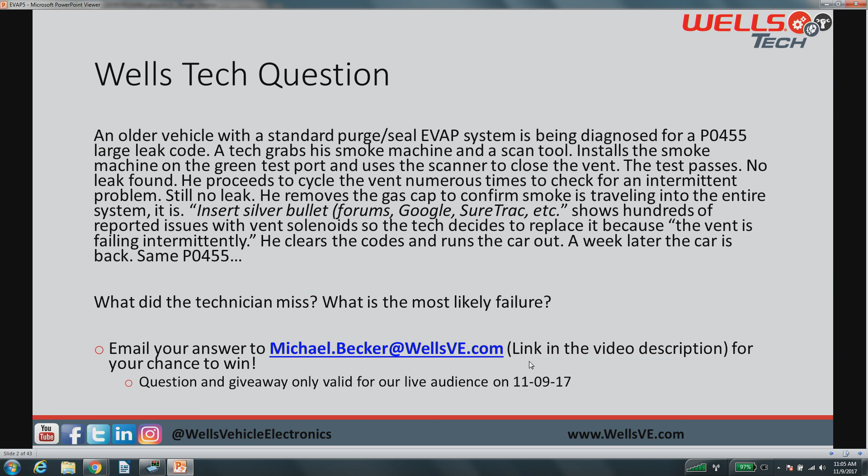What did the technician miss? What is the most likely failure for this problem, okay? Just a hint, guys, it's not going to be an intermittent vent solenoid, and the new vent solenoid that he put on is not failing either, okay? So don't give me that. I want you guys to think and tell me what you think is going to be what he missed in his testing and what the most likely failure is, okay?

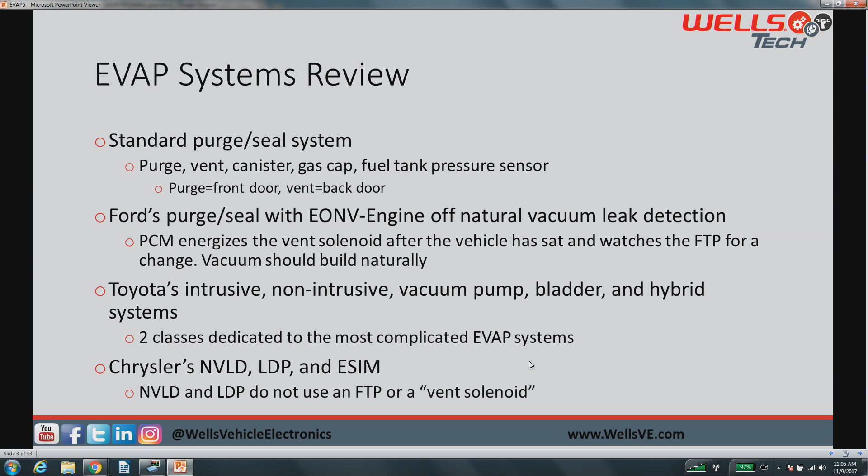All right, let's get right into this, just a little review here. These are the systems that we've talked about before. The first EVAP class, we covered standard purge seal and some Ford EONV. The second two classes we used to cover Toyota and all their complicated systems. And then the last EVAP class we did NVLD, LDP, and ESIM. So if you're not familiar with any of those systems, please be sure to go back and check out those classes where we include that information, because there's going to be some stuff today that is going to build upon those classes, okay?

Again, I'm not going to get into this stuff, these review ones. Make sure to go back and check it out. So what we are going to cover today, we're going to start with the DMTL system, the Diagnostic Module for Tank Leakage System. It's going to be very similar in comparison to the Chrysler leak detection pump system.

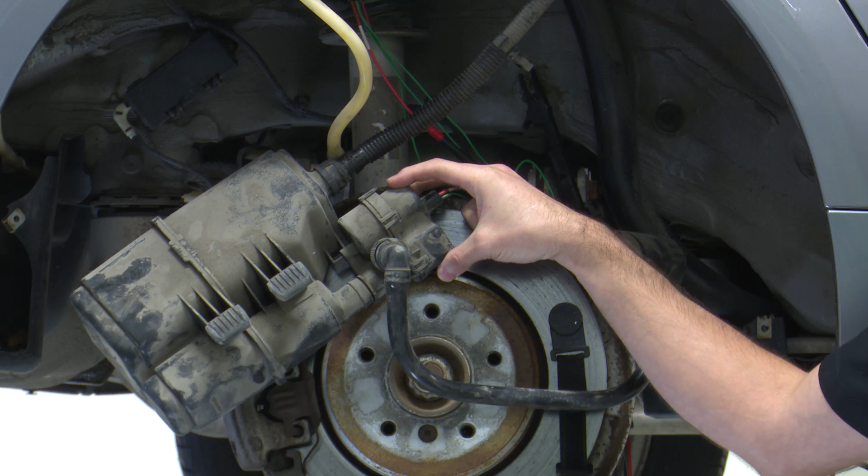It's going to be mounted on the vent side of our EVAP system, and it's usually canister mounted. As you guys can see here behind me on this BMW, if we get a close-up shot of this, you'll see that our valve here, our DMTL pump assembly, is mounted directly to the side of our canister. Now, commonly this part is replaceable separate of the canister, which is kind of nice because these things do fail. Now, this one on this 5 Series Beamer is sitting normally up inside of the wheel well up there. I've dropped it down for testing purposes for us to see it today. But you can see it's all covered in dust.

All right, there's a filter on this system. Right here is an inlet-outlet filter from the canister side. Okay, so keep in mind if you're having restriction problems on these systems, or any system for that matter, check out that filter element and make sure that it's not plugged up. Especially if you have flow issues when you're filling up the tank or something like that, you know, you're putting gas in it and the fuel's spitting back at you. Check out this filter for being plugged up. Your vent path is plugged, it cannot vent the tank out.

Okay? You will typically find these systems on European models. DMTL is going to be common across the board for Beamer, Mini, Land Rover, Volvo, Mazda. Some Hyundai Kias run them. The most common is probably going to be an older Hyundai Accent, is going to be the most common. But you will find these mostly on European models.

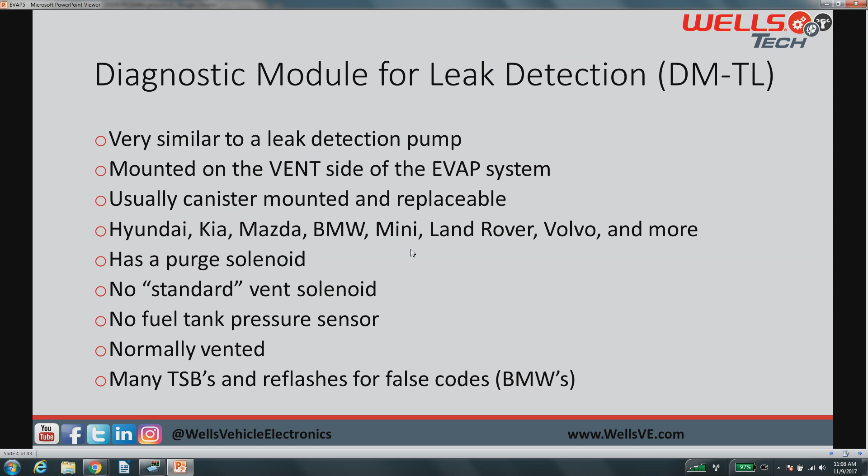This does use a standard purge solenoid under the hood, opens and closes, PCM pulse width controlled for the purge solenoid. There is no standard vent solenoid on here, all right? It is going to be incorporated into our pump assembly. It is not going to have a standalone vent solenoid like you would normally see, okay? There's also no fuel tank pressure sensor. So again, kind of going off of that Chrysler system with no fuel tank pressure sensor, there is no FTP on this vehicle. Don't look for the PID. You're going to waste your time because there's not one.

All right? This system is going to be normally vented, and I just wanted to take a second to call out to look for TSBs and reflashes for these vehicles. BMW especially, common to be setting codes for EVAP problems that aren't actually a problem. The parameters or something got changed in a reflash, and it's setting false codes, okay? So keep that in mind if you're diagnosing EVAP issues on a BMW. Look at your TSBs for any sort of reflashing.

Let's just see what everybody's saying here. Oh, you guys are busy.

Oh, Keith. My eyes aren't spaced that far apart, right? Is it normal looking? You and your theory on Wisconsin people. Oh, man.

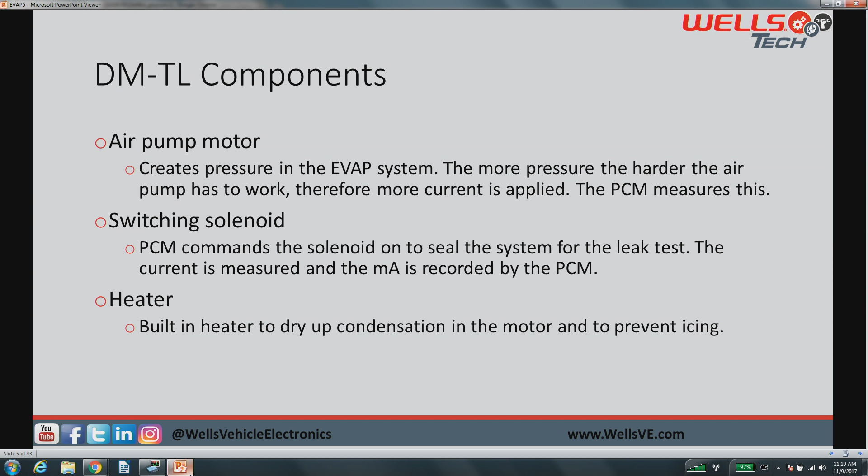So the components in our DMTL system, in that pump assembly, you're going to have an air pump motor in there that's going to create pressure in the EVAP system. The more pressure that's built up in the EVAP system, the harder that this pump is going to have to work. That's the principle of this system.

As we build pressure inside of our fuel tank, inside of our lines, inside of the system in general, the pump is going to have to work harder. The PCM is watching that work, watching how hard the pump has to work. It measures the milliamp draw on this pump, and it's looking for it to increase as this tank is filling up within a set amount of time, right?

Everything on EVAP is going to function over time. So our pump milliamps should start to scale upwards as we build pressure inside of the system, okay? The PCM is measuring this. This is basically our threshold, or let's call it our fuel tank pressure sensor, even though it's not, but this is how the PCM is monitoring the system.

There's a switching solenoid inside of this assembly. The PCM is going to command this to seal the system for the leak test. Again, this is a normally vented system, and the PCM will command this, ground side controlled, to close and test the entire system for leaks.

And then we have a heater that is built into this thing. This pump motor behind me here has a built-in heater, and the goal of this is to reduce any sort of condensation or freezing or icing of this pump motor.

So today we're going to scope everything and show you guys how it all works. We may not see the heater operate because it's about 70 degrees here in the shop. But if it were cold out, chances are you will see this heater operate, as the goal is to keep this pump from freezing up, okay?

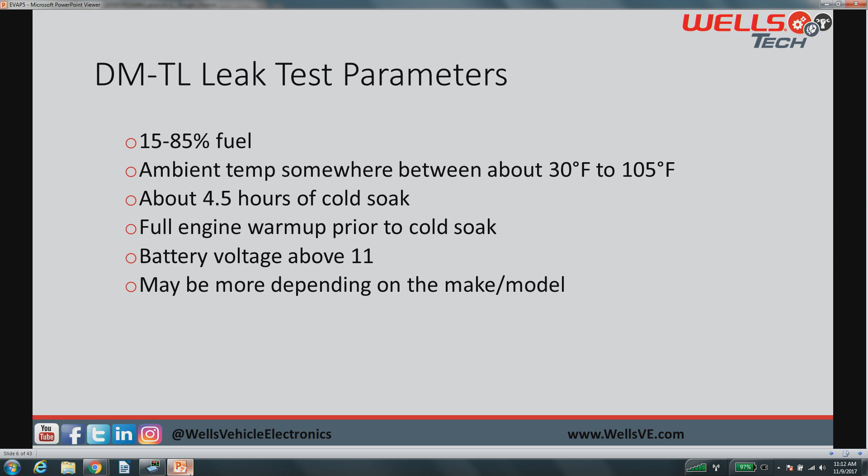Our parameters are going to be pretty average from what we've seen on just about everything else: 15 to 85% fuel, ambient temp normal, about a 4.5 hour cold soak. One unique thing here is that we have to have a full engine warm up prior to our cold soak. Prior to the vehicle sitting, we do need to drive this thing up to full operating temperature, and then it needs to sit for that 4.5 hour mark.

And obviously our battery voltage does need to be above 11 volts, otherwise we can't run the pump, because this thing is running key off, engine off, okay, after the vehicle's been sitting. Now, parameters may vary depending on make and model. These are just some of them that I pulled for this Beamer, but you'll see different parameters on different makes and models, okay?

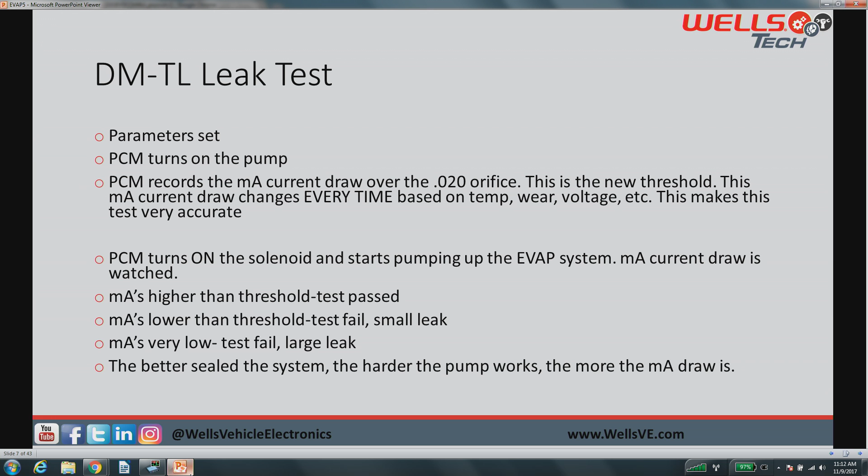So basically, our leak test is going to consist of this: the parameters are set, the PCM turns on our pump. All right, our pump then is going to pump through a .020 orifice. What does this sound like? Sounds like Toyota's system, right? Where it's going to pump through an orifice first to calibrate itself, to put a threshold in there. Every time we do this, every time this test runs, it calibrates.

Now, what is the benefit of this? Variables. We can account for different variables, either wear in the pump, resistance in our wiring, temperature, fuel level maybe, whatever variables are included in this, the calibration is done every single time this test is run for a .020 leak, okay?

So the PCM turns on our pump, does not close our vent solenoid yet, it just turns the pump on, and it watches the milliamp draw on that thing. At that point, without the solenoid being closed, it is pumping air through a .020 leak orifice, all right? So then it records that number, whether it's 20 milliamps or 30 milliamps, whatever it might be, it's going to record that, and that is now our threshold that we need to pass when we seal the system.

So what happens then? The PCM turns on the solenoid and begins to pump air into our system, pumping pressure into it. If our milliamps on that pump read higher than our threshold, we pass the test. There's no leak because we built more pressure in the system than what a .020 leak would have.

If our milliamps are lower than our threshold, only slightly, then we have a small leak. Our threshold was a .020 leak, that's what we have to pass per emission standards. So let's say our threshold was 30, and we're now only at 20 milliamps, that means we're leaking somewhere. We're not building enough pressure inside the tank, so we have a small leak.

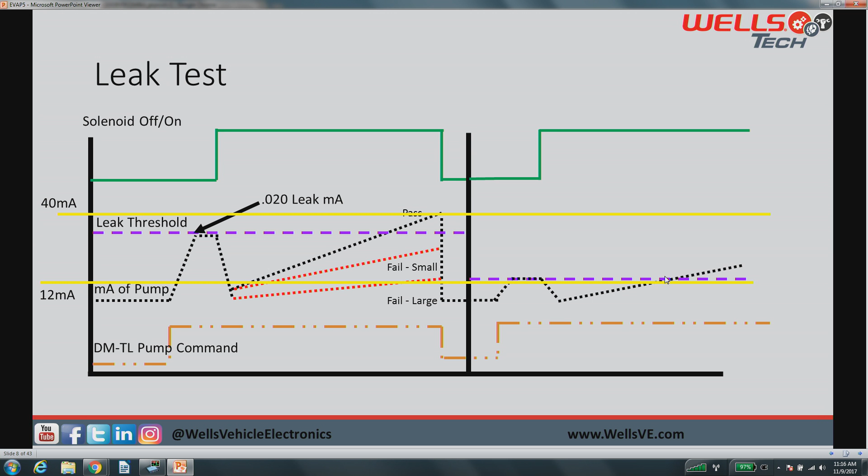So now we're running 15 milliamps. As long as our pressure surpasses that 15 milliamp mark, we pass the test. So that's what it's going to look like real time on a leak test.

Now, before we cover all these different manufacturers, I have everything set up here ready to run through a leak test. I originally tried to do this with an amp clamp and putting it on the scope, but the milliamp draw was so low I was unable to. We're talking 12 to 40 milliamps, it was hard to show on the scope.

So instead, I've run the voltmeter, or the amp meter, in line to our pumping current. So any current flowing through the pump is currently flowing through our meter. Let's go ahead and turn this on, and we'll set this right there. You guys should be able to see that as we zoom in.

Beautiful. And what we're going to do is go in now with the scan tool and turn this on. Let's grab the scan tool, go into our data, into functional tests, and we're going to go into special functions and grab EVAP DMTL leak test. It's kind of nice, we can run the full leak test, and we're going to run the tank leak test. But first, I just wanted to show you the wiring diagram for this.

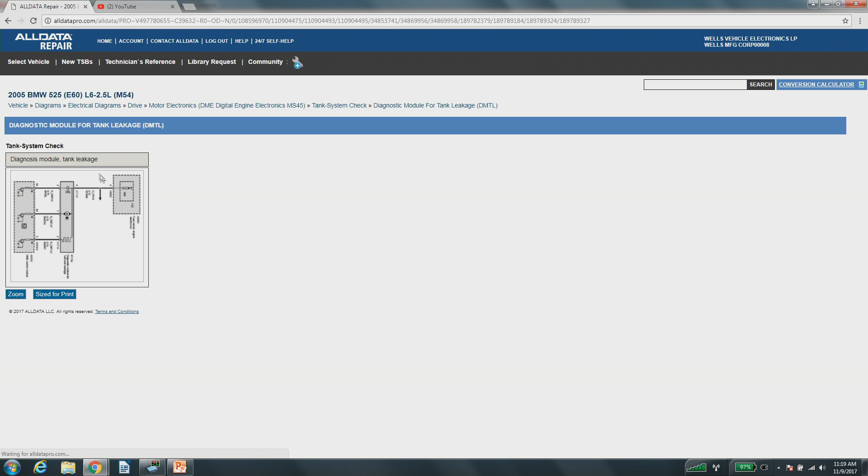But fortunately, if you go into drive, then into motor electronics, then into tank system leak check, and grab the DMTL, it's nice enough to give you a really awesome diagram that you don't have to spend a lot of time going through.

Thank God. So we got a 30 amp fuse, which obviously is splicing off into something else, whatever it might be, because 30 amps is excessive for a pump that's only going to run in the milliamps. But we're going to feed that down into a single power wire into our DMTL system, where we have a solenoid here, closing our vent, essentially sealing our system. We have our pump motor right here, and then right here is our heater, okay? So 4 wires going to our pump.

So right now, I have this wire disconnected, and I have the meter running in between here to monitor the current that's flowing across this pump. The PCM is also watching it down inside here, watching that current. And also, I have the scope hooked up here and here, so we can watch the voltage levels of our solenoid, our heater, and our power in, just because I thought it might be interesting to see. But again, we might not see our heater trigger because of the temp inside the room right now.

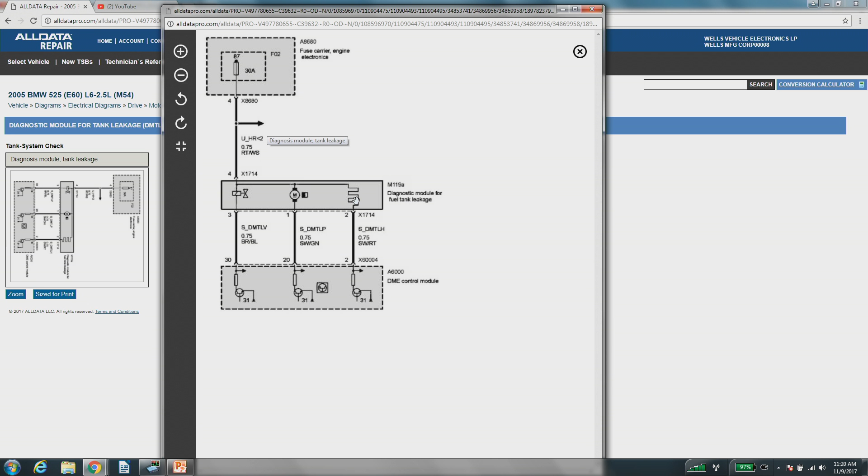Okay, let's just make sure I'm not missing anything here, and then we'll get back to this.

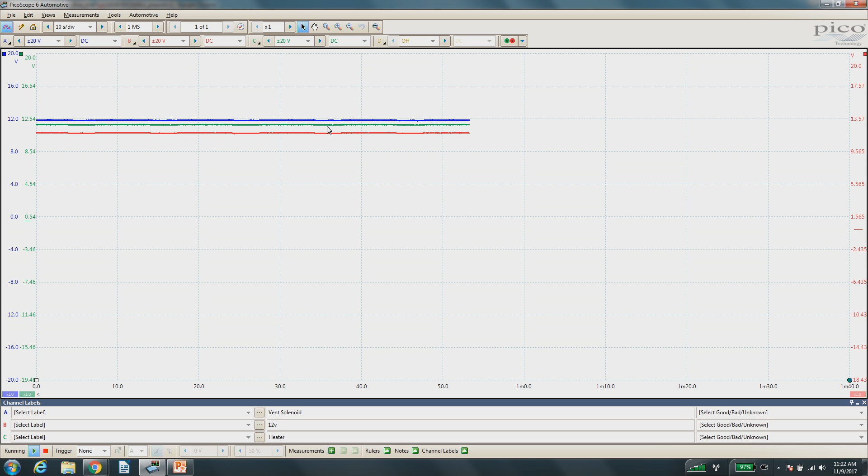All right, beautiful, look at that. Scan tool and scope on the same screen, that's what I like to see.

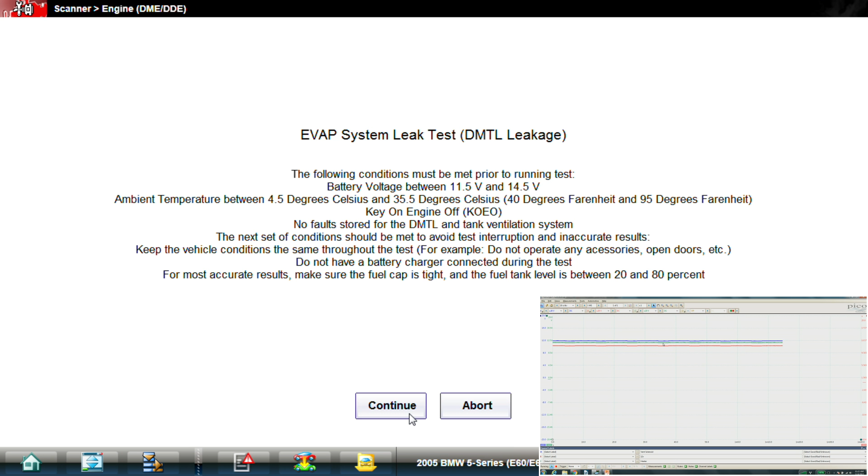So we're gonna jump into the tank leak test. We're gonna run this thing through the test. Turn off the ignition, turn on the ignition. Wow, I did that fast. I think it's kind of cool that Snap-on includes some of these parameters for running the test. I think it's kind of neat. All right, so we'll continue.

Before I click yes, I want to have this camera up so we can watch the milliamperage, beautiful. And then we'll have the Pico lab scope up. We'll leave it at that. I'm going to keep my head out of the way here. I'm going to click yes.

And now it says reference measurement in progress. 28 milliamps right now, it's measuring the reference. And I don't know if you guys heard that click, but the vent solenoid just closed and our milliamperage changed.

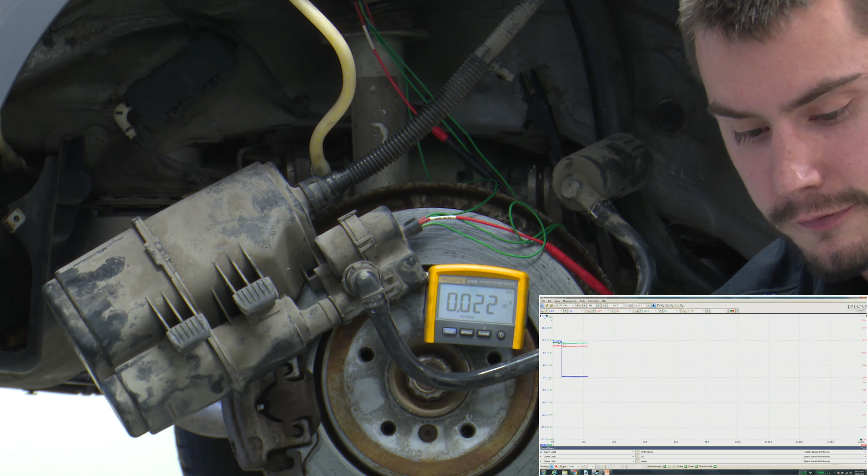Also, look at the scope. We went from 12 volts down to 0, meaning the PCM has now grounded our vent solenoid or vent for this system. So now the scan tool is telling me that it's reading the 1 millimeter tank leak measurement.

A 1 millimeter leak would be equivalent to the 40,000th leak check. This would be the large leak check. Our solenoid is still closed, and our amperage here is at 23 milliamps.

What was our spec again? 28, I believe it had hit just before for our 20,000th leak check.

So right now, guys, we're building pressure inside of our tank, and now depending on fuel level and tank size, is going to depend on how long this takes to do it. But the PCM should understand what fuel level is and accommodate that time accordingly.

So our vent solenoid is going to stay closed. You can see on the green channel our heater has not turned on, and I don't expect it to.

So our pump is running, 24, 25 milliamps currently. And remember, guys, this happens key off, engine off.

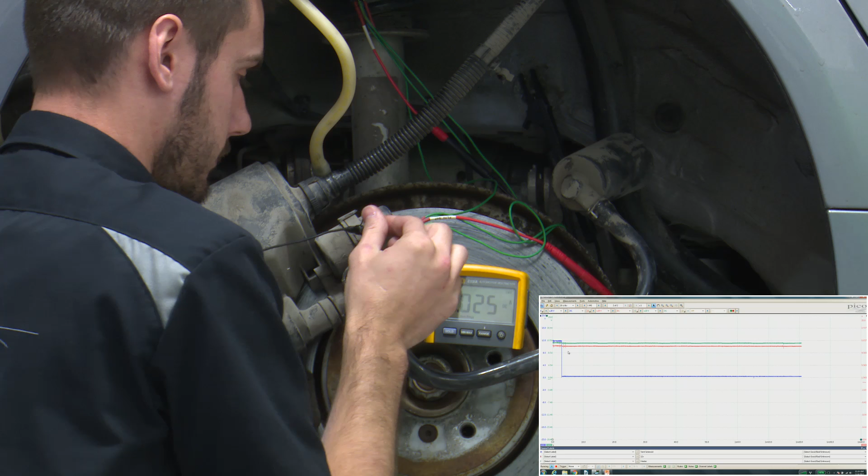Actually, I'm going to get over to the other side here. I'm going to get my microphone close, and you guys might be able to hear the pump running. So it's very, very faint sound. The average customer, while it's parked in their garage, probably will not hear this thing run, but it is definitely running, especially when the wheel well fender liner's in here and the tire and everything is on.

You probably won't hear it. So right now, the scan tool is telling me that we are running the 0.5 millimeter leak check, which is the 20,000th or the small leak check. And what we have to do now is we need to have this milliamp value cross our threshold.

So just to show you guys we're building pressure, I'm going to go ahead and pull the gas cap, and we should see the milliamp level go down because I just released the pressure. All right, install it again, and we'll see this scale back up.

So now if this doesn't scale back up quick enough, we're going to fail the test because it fell outside of the time parameters. I don't know what the time parameters are, but it's possible that just caused us to fail the test, or we might still pass. Hard to say. We're going to have to let the scan tool run the test and find out what happens here.

So it's still telling me that the leak measurement has started. It's running the 0.5 or the 20,000th leak check. And I'm thinking this thing's maybe a little bit low on fuel, so it's going to take longer to build the volume of pressure inside of the tank.

And I'm probably growing gray hair right now. This is almost as bad as watching paint dry. But I want to get through this test and just show you guys that we should get over our threshold. Or we're going to fail the test before it reaches the threshold because I took the gas cap off. See what happens.

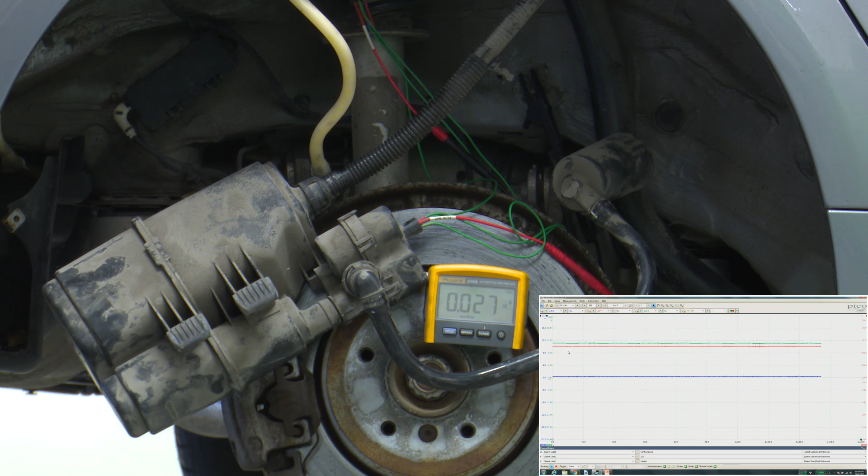Perfect, thank you. So as you guys can see, we are reading the 0.5 millimeter leak check, and it is still currently running, so we are still within our time parameter, and we're sitting at 27 milliamp draw on this pump right now. And I think it first pulled 28 for the leak check. So if we can reach over 28, 29 milliamps, whatever it might be, this should be a pass.

See, now this is the part where if Glenn was here, he'd start singing show tunes for us. I think he called me out one time when we were doing a video and I was singing the Jeopardy theme song.

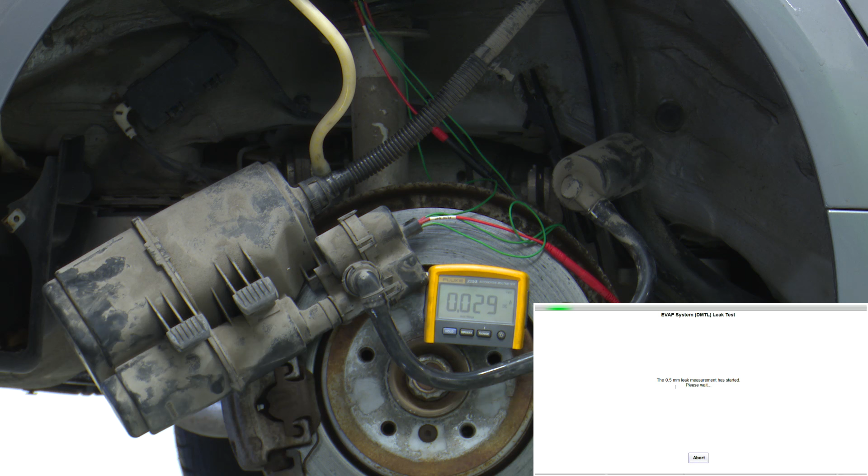All right, so we're at 29 milliamps. I'm kind of expecting this will hit up and over 30, but let's see. I would think if I didn't pull the gas cap, we would have probably already passed the test, but I did, and so here we are. There we go, 30.

And the vent just shut off. I don't know if you guys heard it click, but if we bring the scope back up on the screen, we can actually bring the scope up full screen. And then we'll see, beautiful. There we go. You can see our vent solenoid has shut off. And when that shut off, we get the DMTL leak test complete. There were no leaks detected.

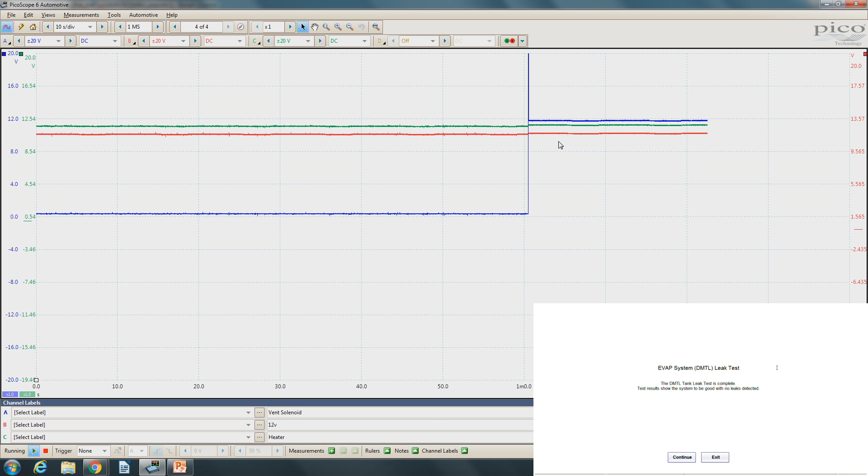So really, is it a super complicated system? I would say no. Is the testing of it a little bit different than the ordinary? I would say yeah, probably you're going to attack this a little bit differently. You can still smoke test it like normal. All you're going to have to do is make sure that you bypass the vent here, either with the scan tool or with some jumper wires, and close that vent up and seal the system. Smoke testing should remain pretty normal, okay?

It's kind of nice, everything is mounted right here. You don't have to go chasing down a standalone vent solenoid or a standalone fuel tank pressure sensor. It's all mounted to the canister right here with a couple hoses going off to purge in the tank and the air filter. Not super complicated, but something we need to understand how it works, because this is the only system where we're out there measuring the milliamp draw on our EVAP system.

Kind of unique, but I really like the fact that every single time it runs the test, it's re-upping the threshold, right? There's so many variables on cars nowadays that I like when we can re-verify our threshold every single test.

All right, so are there any questions on the DMTL system before I move on to some of the other systems? I don't want to move on if you guys have any other questions, because I have everything set up here. So if there's anything else you want to see, I also have the whiteboard off to the side if you guys want me to draw out some pictures. I mean, my artwork sucks, but if there's any confusion on this, I want to clear it up now before I move on.

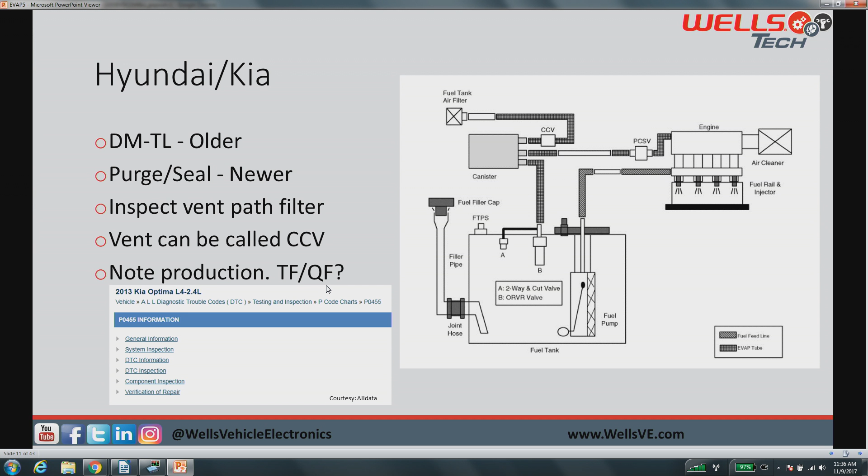Also, when you're working with Hyundai and Kia, note the production of the vehicle. Was it produced in the U.S. or in Korea? Because they are going to have differing wiring diagrams. The TF and the QF Optima use different wiring diagrams. You're going to find different colors on your diagrams depending on whether it was built in Korea or in the US. So keep that in mind. If your wiring colors don't match up, chances are you're on the wrong production of the vehicle.

Here is a leak test from a 13 Optima 2.4 liter non-turbo motor. Pretty standard leak test, this is what we've seen all the time. Our purge solenoid opens, at some point our vent solenoid closes, and we're just watching our fuel tank pressure sensor. Pretty basic, but I wanted to call out all of these nice parameters and information here.

I also like the fact that they use the word 'under pressure' - check fuel tank under pressure during evacuation. Can't just say vacuum, they got to say under pressure. Just funny wording they use. But I like that they include all these specs for the enable conditions, and these thresholds and diagnostic time. I really like that they're giving us the time limit of these windows and the specs for what they're looking for.

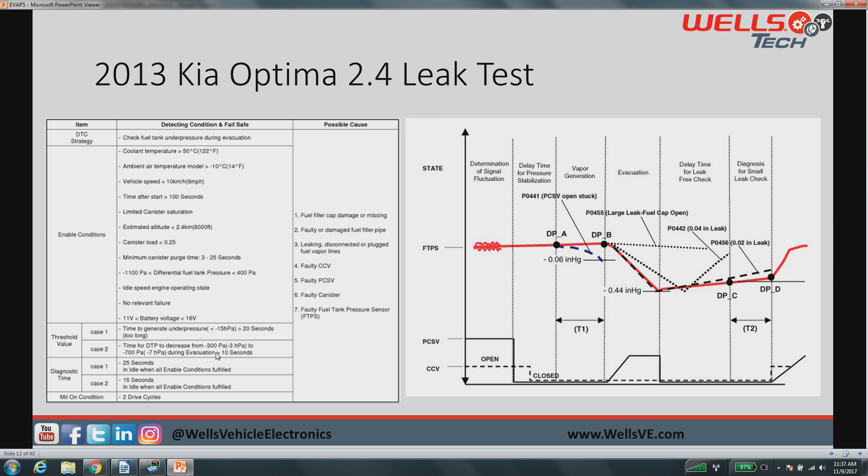As a technician, we're always looking for specs, whether it's a torque value, a test time, a setting condition. We're always driven off of numbers and specs because that is the only way we're going to be able to duplicate this exact - well, not this one on a Kia most likely - but the exact testing conditions and parameters and test.

Sometimes when you're using a scan tool, it's not going to do everything exactly as the vehicle would test it. Few and far between, but it's possible. So you have to set the test up yourself. Well, on a vehicle like this 13 Optima, they're nice enough to give us all the specs that we could build the test ourselves with a set of jumper leads and a stopwatch. Really, that's all we would need. We'd have to monitor fuel tank pressure, jump our vent, jump our purge, have the engine running, and have a stopwatch. That's all it would take to run the test because they give us all the parameters. I think it's great that they include this, and that's why I have that up on the screen.

Now let's get to another European vehicle, VW and Audi, or whatever you're going to call it, Volkswagen and Audi. Many of these are going to be running a leak detection pump system similar to Chrysler. Some of the newer systems are going to be using DMTL, and some of them are most likely running a standard purge seal system also. So the moral of that story is make sure you verify your service information before you go tackling a Audi or Volkswagen EVAP system. I wouldn't say every model or every year uses the same system. I would be looking at service information every single time because there could be mid-year cutoffs or something like that.

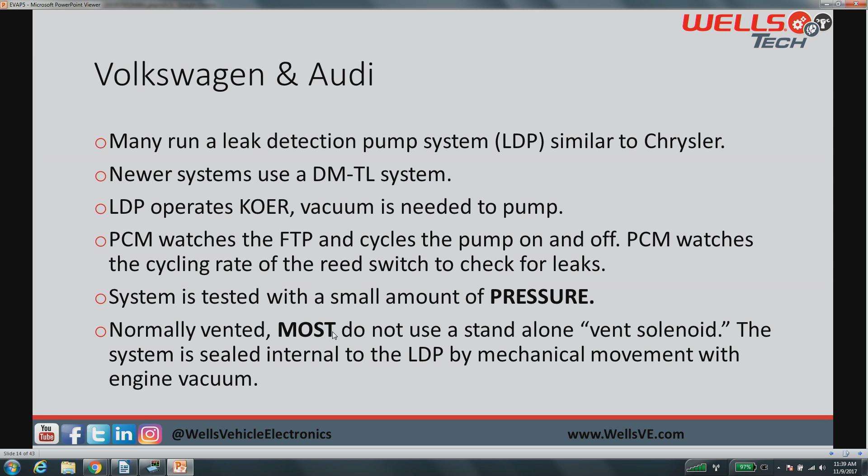It is normally vented, and most of these, and the key word here is most, do not use a standalone vent solenoid. It is going to be internal of the LDP. Here's the internals. This is going to be almost the exact same as the Chrysler one we did last time, so I won't spend a lot of time on this, but basically we have to have vacuum coming in and this diaphragm moves up and down to create pressure inside of here. Also, when vacuum is applied, it's going to seal the system, essentially creating a vent valve effect.

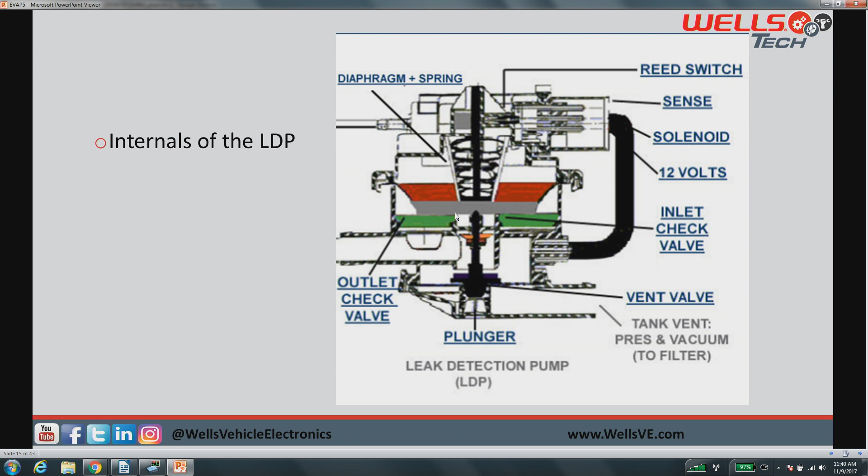Okay, some other differences with VW Audi. They might have a pressure holding valve in line between the tank and the rest of the system. Now, I'm not going to dive into this too deep, but it's very similar to Honda, which we're going to cover in a few minutes when we get over to the gas tank. So it's going to have that. The difference is this one might not include a parallel bypass solenoid. It might only be mechanical, okay? I'll explain that in just a minute.

Also, watch out for check valves on the purge solenoid hose, okay? A lot of Volkswagen and Audis are turbocharged vehicles. We have to have some sort of check valve on that purge line, because think of what would happen if all of a sudden this car was purging and you suddenly got on the boost, right? You hit the pedal and the turbo spooled up and now we got a ton of boost in the intake manifold. What if that purge solenoid was open at that moment? Could we potentially push 8, 10, 12, 15 PSI into the EVAP system? Scary. We could end up splitting seams, blowing hoses. There's so many possible things that could happen if this check valve weren't there. So they put a one-way check valve in this line to verify that that doesn't happen. But think of what happens if it fails, okay? Just keep that in mind to look for that.

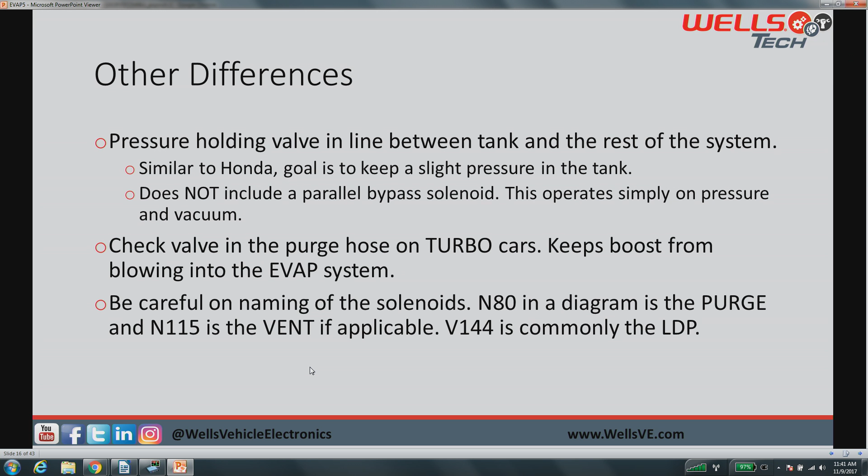Also be careful on wiring diagrams for these things with the naming of the solenoids. Trust the numbers, don't trust the translation, okay? So an N80 in a wiring diagram is going to be our purge solenoid, okay? An N115 is our vent solenoid, and a V144 is going to commonly be called our leak detection pump, okay? N80, always purge, N115 is vent, okay? Keep that in mind. They might switch up and say an N80 is a vent. Well, that's not right. The N80 will be the purge solenoid, okay?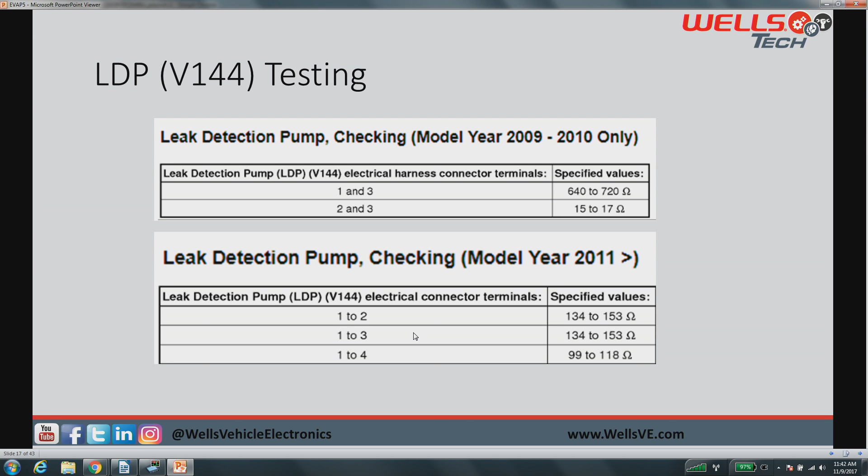We have our pump, we have our solenoid, we have our power in, and we have our heater circuit, okay? That's what the LDP is missing. It's missing the heater circuit. That's why we went from 3 wires to 4 wires.

For proof, here's our wiring diagram. N80, purge solenoid over here in the circle. N80 is always going to be purge. I hate using the word always. I would say, is most of the time going to be the purge? I would say benefit of the doubt, N80 will be purge. I'm sure there's one example out there where the N80 is something else, but if you see N80, it's going to be purge. Then we get to V144.

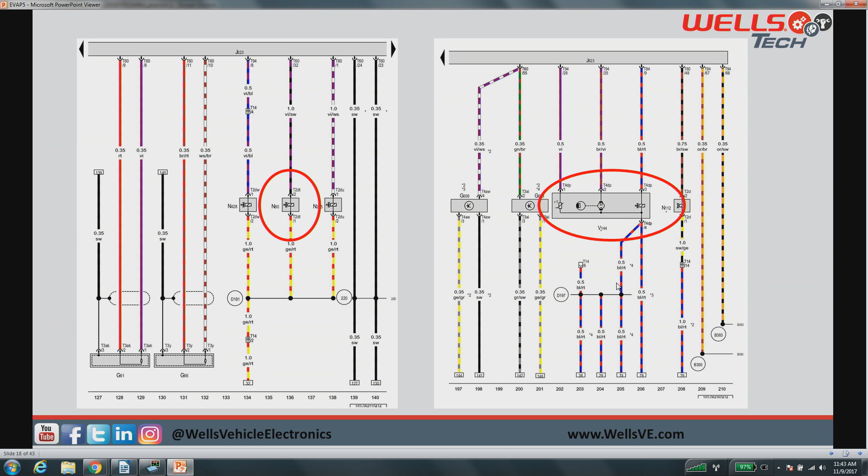This is our leak detection pump, as called by Volkswagen Audi, but this is actually a DMTL pump, okay? We have power going into it. We have a solenoid and a heater, or vice versa. It's hard to tell in this diagram. And then we have a pumping motor in the middle, okay? So keep that in mind. It might be called a leak detection pump, but that's not truly what it is.

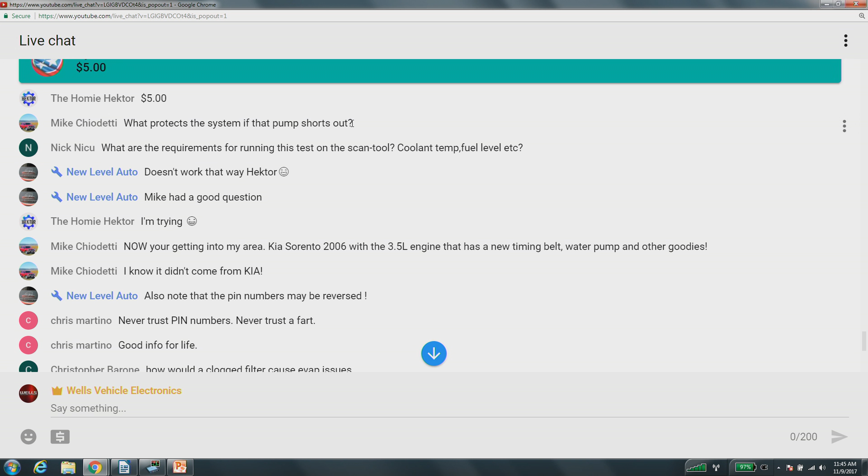What protects the system if the pump shorts out? That's a great question right here. Mike, I assume you're talking about the DMTL system like this one behind me. I'm thinking that this PCM has current limiting built into it. I would think that it's going to have some sort of resistor or something inside the PCM that is going to current limit this thing. So if the pump does short out, you would not burn out the driver in the PCM, especially on newer stuff. Older stuff might be hit and miss, you might burn out a driver on the PCM. But how do you check that? You look for control, right? You throw a lab scope on it, and you see if the PCM's commanding it on and off, right?

What are the requirements for running this test on the scan tool, coolant temp, fuel level? You're going to find that that'll be different make and model, but typically they're pretty much consistent with that 15 to 85% coolant temp, depending on if it's vehicle off or vehicle on. It'll usually be normal operating temp or under a certain temp to match with intake air temp.

All right. 06 Sorento 3.5, that has a new timing belt, water pump and goodies. All right. Never trust. Oh, that's good. Good stuff, guys. You can actually have the comments up on the screen here, Dave, while I'm looking at this.

How would a clogged filter cause EVAP issues? Christopher, clogged filter, now we're going to talk on EVAP filter. We're not talking air filter. Even though they could be commonly labeled in a diagram, we're talking EVAP system filter, like this guy right here. The EVAP system needs to breathe. After it's made its way through the canister, after it's made its way through the vent solenoid or valve, whatever it's using, it has to be able to breathe in and out fresh air. It needs to be able to expel air when we're pumping fuel into it, or it needs to be able to suck air in when it's drawing vacuum on the system.

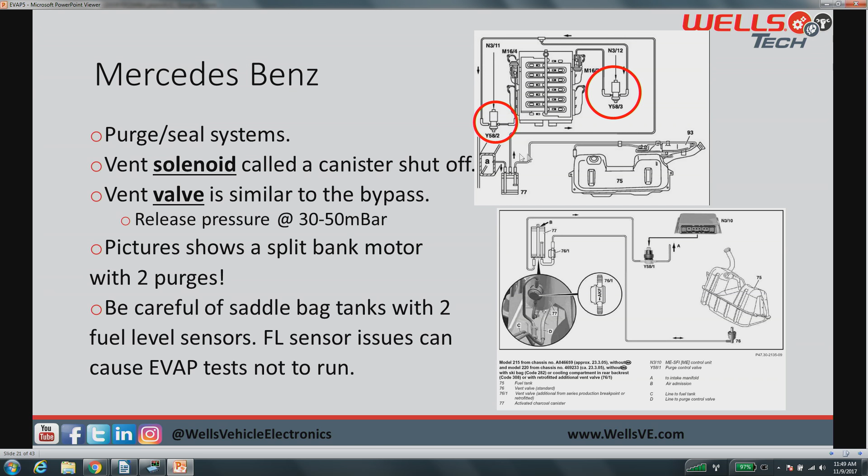So let's think about this for a second. Our engine, a newer engine, computer controlled, has purge solenoids, 1 for each bank. Maybe each bank is, most likely each bank is going to be individually controlled. This one actually might, being that it's split manifolds here, it might even be controlling 3 cylinders at a time for fuel trim with potentially very, very many air-fuel ratio sensors. Hard to say, but my point here, guys, is we have 2 purge solenoids. Think of what happens if the computer commands those open, okay?

Let's take a little trip here. So our EVAP canister is full of fuel vapor at this point, right? The computer says, okay, I assume we have fuel vapor sitting in our canister that I need to get purged out of there. I need to get that drawn out so that I can store more. So what do? I open up the purge solenoids. Now I'm smart enough to know that when I open up my purge solenoids, I'm going to have some fuel vapor entering into the engine. So what am I going to do? I'm going to maybe cut back a little bit of fuel preemptively. I don't want to cause a rich condition. I don't want to cause any sort of issues.

So I will most likely pull back some fuel before or while I open up our purge solenoids on either side. Depending on the system, it might wait to do that until it sees oxygen sensor responding. Hard to say, but let's just talk in theory here. Let's say that one of those purge solenoids didn't open. Okay, so you have 2 purge solenoids connected to a single line going to the canister. We got a ton of fuel vapor rushing up to the engine, being sucked out by engine vacuum. Now we have one that's closed and then one that's open. So in theory, the one that's open over here could be sucking in a ton of fuel vapor, double what it normally would be if this guy was open over here. Now this one's not open, not drawing any vapor. In theory, could we have a very split fuel trim for this engine?

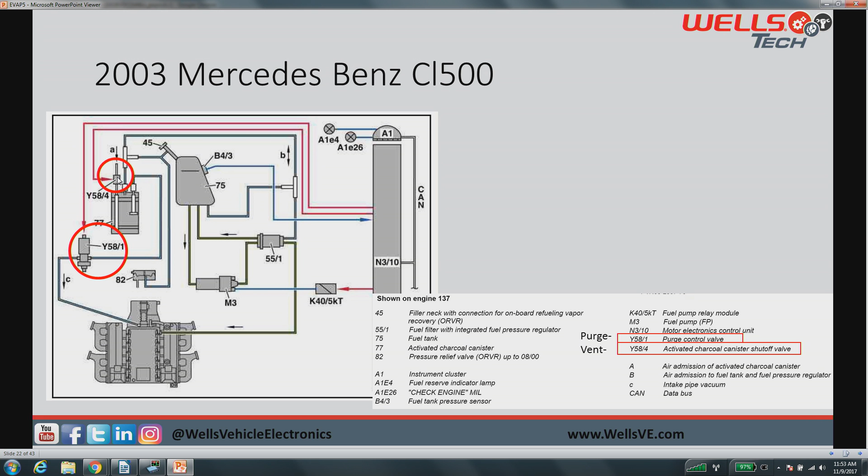And then here is just a 03 CL500 diagram. What's interesting that I found in here is that it's showing a V12, right, 6 cylinders per bank, but this is only a 5-liter V8 sitting in the CL500. So don't trust this diagram or this engine picture here, most likely it's just a generic picture. But here we got Y58.1 is our purge control, and Y58.4 is our activated charcoal canister shutoff valve, that's what they want to call it. I don't care, all we care about is that it's got some way to seal the system on the vent side of the system, hooked up to some sort of wiring. Standard purge seal at that point, guys.

Okay, Honda and Acura, they're going to do things a little bit differently, and that's why I have it all set up over here. We'll get to it in just a second. I want to talk through it first.

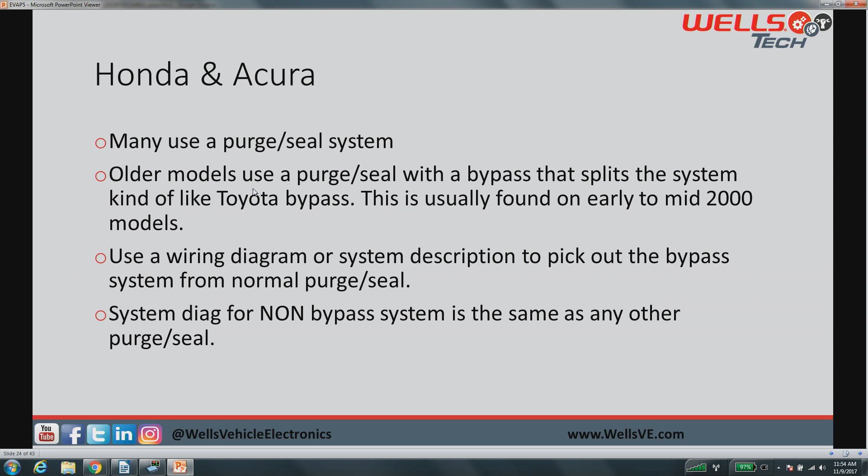Okay, Honda and Acura, many times on most of the newer vehicles, is going to be using a standard purge seal system, basic run-of-the-mill, tested the same way that you would. On older stuff, late 90s, early to mid 2000 models, you will find that they're going to use a purge seal with a bypass that's going to split our system up, similar to the way that Toyota did for the intrusive and non-intrusive systems. It's going to be similar but different, I guess is the best way to describe it. But the best way to figure out what system you're dealing with is look at a wiring diagram or system description to figure out if you're dealing with a bypass system or a normal purge seal.

So why does this matter? Why do we care about this bypass? Well, the testing operation of this is going to be a little bit different. Our normal purge seal system testing, if you were to test it like you would a normal purge seal system, it will most likely throw you for a loop and get you to replace the wrong parts, and we don't want that. So why do we run a bypass?

Well, the goal was to seal the fuel tank. If we can seal the tank and it builds pressure inside of it, the tank will not create as many fuel vapors. We talked a little bit about this when we talked about the Toyota hybrid system that they're using, about being able to seal the tank off, and it's going to reduce vapor generation. Because when we turn on the purge solenoid, it wants to draw a vacuum on the system, right? Our goal is to suck fumes out of our canister. But if we suck on the tank as well, we're going to create a vacuum inside of there. We're going to create a place for vapors to grow, right? We're going to suck all this out of here. Now our vapors are going to have somewhere to grow, and we're going to create more vapors inside of the tank. If we had a way to seal that side of the system off, in theory, our vapors would generate with less volume. Okay, so that was the goal of this bypass system.

It's going to use a mechanical valve and an electrical solenoid to make this happen, all right? So normally this valve is going to be closed, mechanical and electrical will be closed.

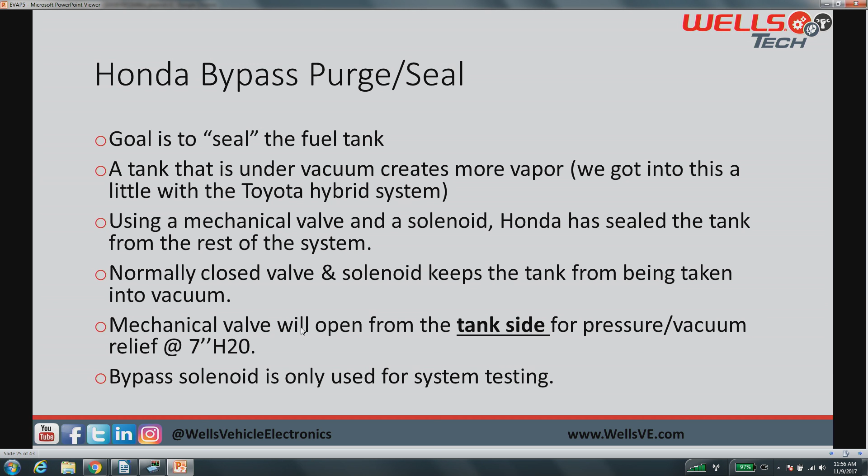It's like a parallel system, and we'll get it up on the screen here in just a second. Key note: the mechanical valve will open on this thing from the tank side. I need you guys to remember that, burn that into your brain. Tank side of the system at 7 inches of water, pressure or vacuum. Tank side only, remember that, because that's coming up here in just a second.

It's only on the tank side that it's going to relieve this pressure or vacuum. And the bypass solenoid, the only reason the computer is going to turn that on is if it's testing the system for leaks.

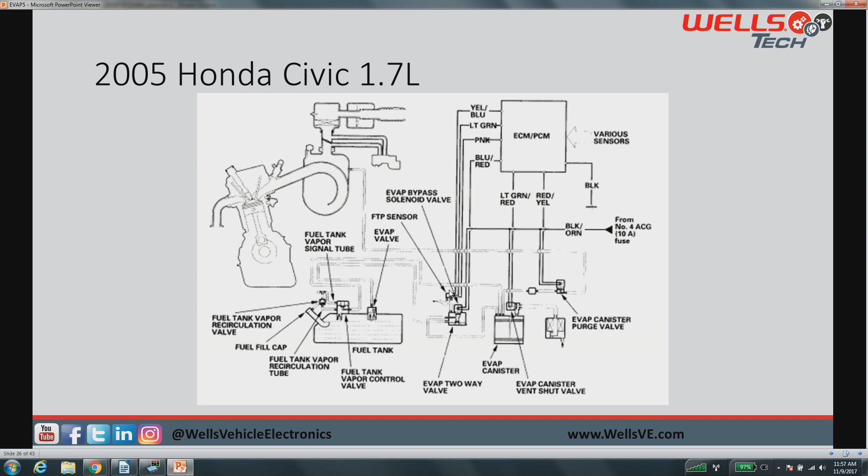So here's what it looks like on paper. Pretty crappy picture here, but basically we have our tank running through some hoses to a couple valves, going to our bypass valve right here. Fuel tank pressure sensor is mounted to our bypass valve. We have our canister, we have a purge valve, and then we have a canister vent shut valve. So purge, vent, and this bypass stuck in the middle. It's important to note, guys, our bypass and fuel tank pressure sensor are prior to our canister, okay?

Fuel tank pressure, see where this is, guys? This is where it becomes important. Do you see this, what I'm circling right here? Fuel tank pressure is on the fuel tank side of the system. What does this mean? If we go to this vehicle looking for a leak or testing the system for whatever reason, if we start this thing up and apply the purge solenoid, even with the vent open or the vent closed, I don't care which way you're going, you can apply purge to this entire side and you can still have pressure in your fuel tank.

The only way we apply purge vacuum or engine vacuum to the fuel tank is if our bypass solenoid is open. Remember, the fuel tank side is what we're going to allow pressure or vacuum to leave from. This two-way mechanical valve will allow pressure or vacuum to bypass this plane right here. So if our tank ends up in vacuum or ends up in pressure, we can flow through this valve.

So again, just to reiterate, system purging, the PCM opens it up, duty cycle, vacuum is drawn on the canister side, and the vapors are drawn into the intake manifold. It will not draw vacuum on the tank.

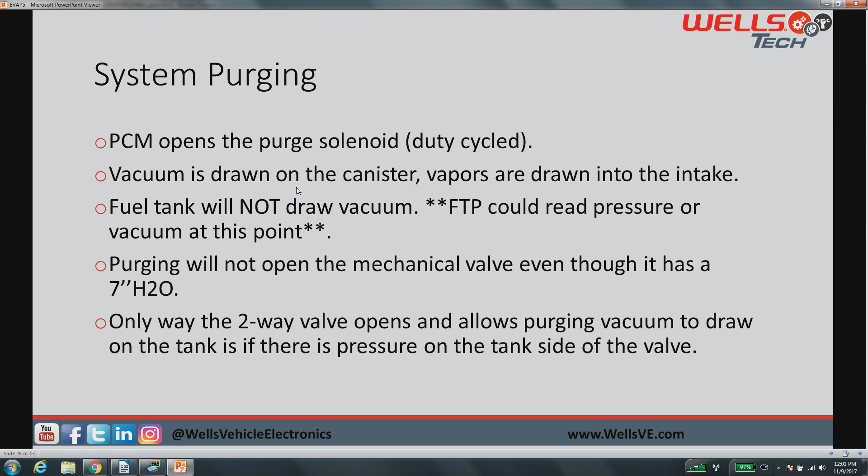The leak test, like I mentioned just a second ago how we went through it, but fuel tank pressure sensor on this thing is going to be roughly at atmosphere, about 2.5 volts. After a cold soak or a hot soak, we should see this thing off of the 2.5 volt mark, right? If our tank is sealed, if our bypass is closed and our tank is not leaking, we should not have atmospheric pressure in this thing if everything is sealed up. If we show atmospheric pressure, we have a leak.

Whether it's the bypass, a hose, the tank, the filler neck, the gas cap, I don't care. It doesn't matter. We have a leak on the tank side of the system. Or the bypass is opening the entire system up, so we could have a leak in the purge or the vent or the canister or all the hoses in between. Basically, our fuel tank pressure sensor should not read atmospheric if this thing went through a hot or cold soak.

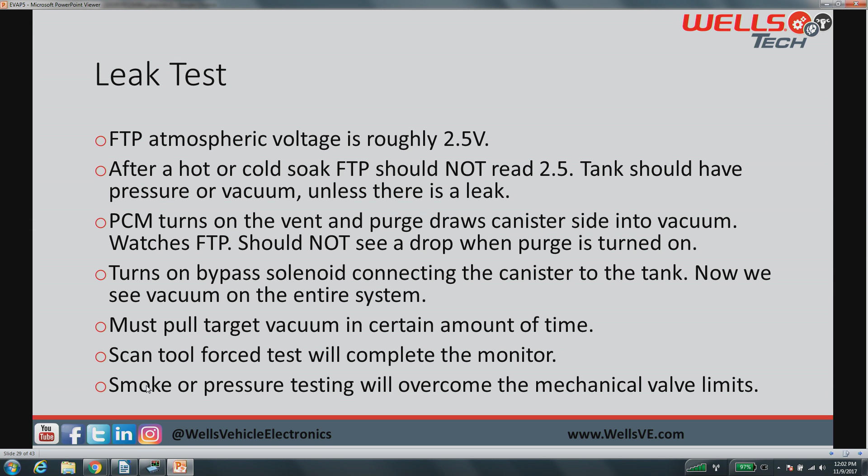I went over all of this. Interesting note, usually you can force the monitor to complete with the scan tool, and smoke testing or pressure testing will overcome the mechanical limit of this two-way valve from the purge side.

What does that mean? Again, you're putting smoke into this side right here. You can overcome the pressure relief on this two-way valve, and you will show pressure on the fuel tank pressure sensor, but you can draw vacuum on this thing all day long, and all it's going to do is make it seal up tighter. It's not going to allow vacuum to transfer.

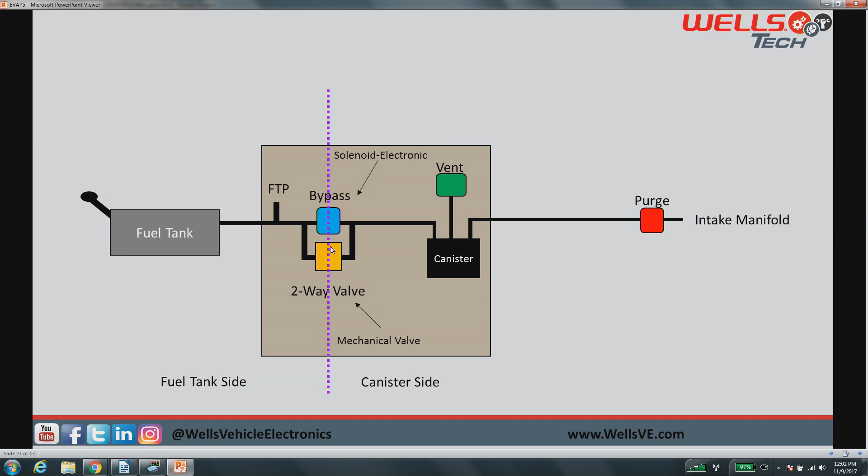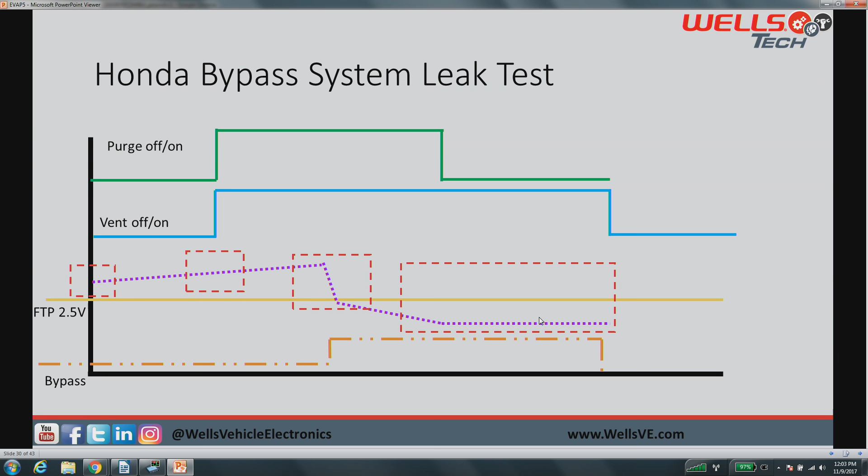Purge vacuum will be applied to the tank. The system is sealed, and we draw the system down into vacuum over time dependent upon fuel level and within the time thresholds. At some point here, we should hit some sort of threshold that tells the computer to turn the purge solenoid off, leaving the system sealed. With the system sealed, again, we're going to watch it over time just like a standard purge seal test.

Now usually on these systems, I know I didn't draw the back half of the test, but usually you will then see maybe the vent solenoid come off and watch that fuel tank pressure sensor return quickly to verify blockages or lack of blockages in the system.

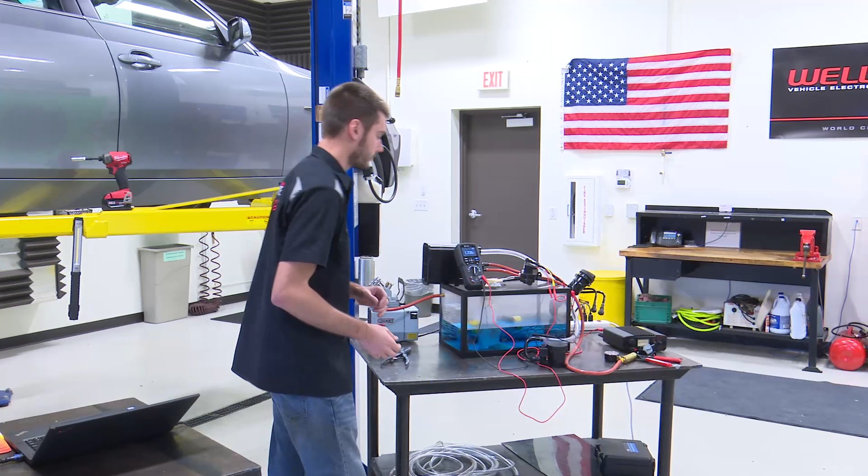Okay, before we get to Honda's EVAP system, let's head over here and I'll show you guys what I've got set up. Of course, the rubber duckies are back. One of them is having a better day than the other one. The other one's drowning over here. But I have this whole system set up.

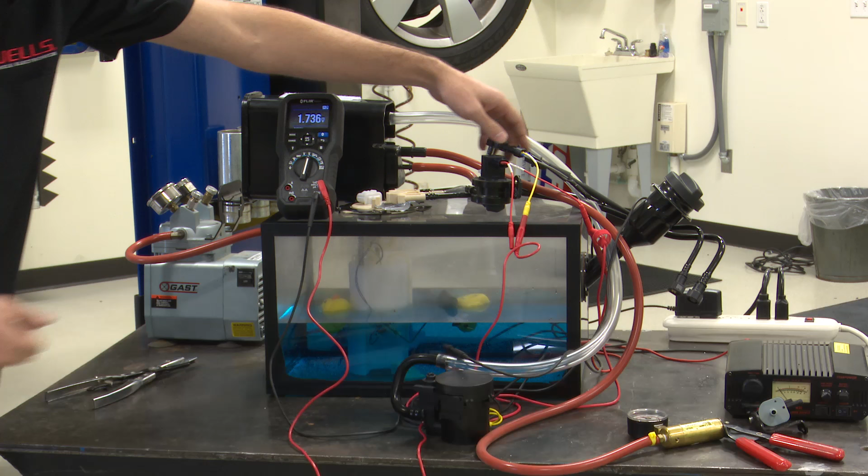Now, the difference here is this is not exactly a full Honda system. This is a bit of a mishmash of parts I had laying around. This is a Honda bypass solenoid right here. If we can get a close-up shot, you can take a look. This is our bypass solenoid. You can see our fuel tank pressure sensor is mounted directly to our bypass solenoid. Our FTP is right here. This is a GM FTP, the one I've been using the whole time for the class, guys.

So this will scale opposite of most. When we build vacuum, we'll increase in voltage, and when we build pressure, we'll decrease in voltage. This is a GM style vent solenoid. Doesn't matter, all I'm trying to do is seal up the system. And we do have a GM style canister, doesn't really matter guys, all we're trying to do is demonstrate the system. The only difference between a standard, let's call it a GM purge seal system, and a Honda bypass system is this guy right here. This is what throws everyone for the loop.

So let's show some testing with this thing. All right, first of all, what are we going to do? The engine is going to go into purge mode, okay? So right now we're going to start purging on this system. Those of you who have done a lot of EVAP testing know that typically when you turn a purge solenoid on, even with the vent solenoid open, you will typically see some sort of slight reaction on the fuel tank pressure sensor.

1.736 volts. Not changing whatsoever. And of course we're not building vacuum in the system because our vent is open still, but usually on a standard system you will be able to see a small amount of change. We're not going to, because what did I say before? Our bypass is in the middle of the system right now and it's sealed. Our tank is its own unit right now. We can draw vacuum on this thing all day long and we will not create vacuum on our tank side where our fuel tank pressure sensor is mounted.

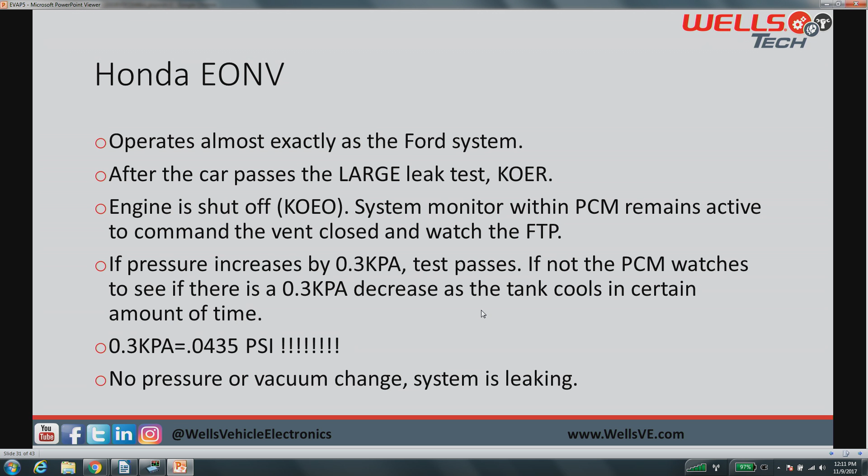PCM is going to remain partially active. We're going to close up the vent after a certain amount of time, and we're going to watch for pressure or vacuum build up inside of the system.

Now, I thought this was interesting that Honda is looking for a 0.3 kPa pressure or vacuum increase or decrease inside of the tank. I thought that was just a crazy, crazy number because when crossed over to PSI, which is something that I understand more, that's 0.043 PSI. That is less than a tenth of a PSI is all this thing is looking for, right? That's all it's looking for to verify the system for a small leak.

So if there's no vacuum or pressure change, well then it must know that the system is not sealed, and it's allowing that pressure or vacuum to escape through whatever hole it might be. But if there is a pressure or vacuum change, all it's looking for is 0.0435 PSI. Crazy small number.

All right, Nissan and Infiniti. They're going to use a lot of things similar to Honda with their bypass system on early models, and then a simple purge seal on more recent models.

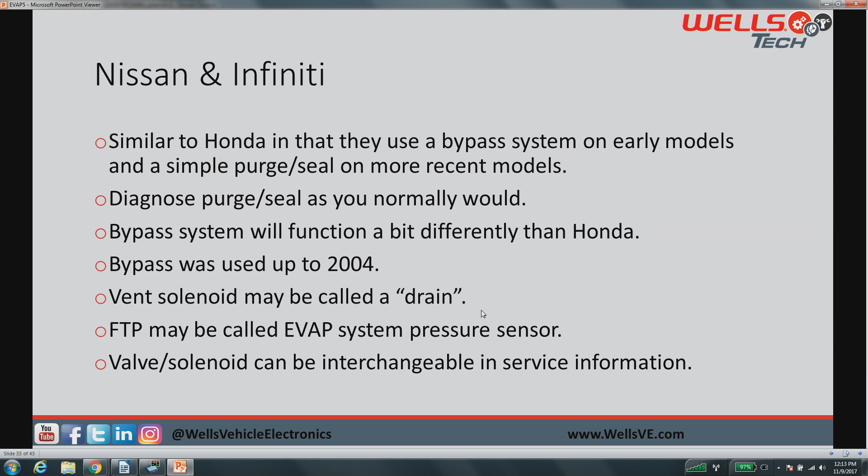You're going to obviously diagnose the purge seal like you always would. The bypass system is going to be functioning a little bit different than Honda, and it was used up until about 2004. The vent solenoid may be called a drain solenoid on a Nissan. Just keep that in mind when you're looking at a diagram. If it's called a drain and it's got two wires going to it, it is a vent solenoid.

Fuel tank pressure sensor may be called the EVAP system pressure sensor—still the same old thing. And many times in Nissan and Infiniti, they interchange the terms valve and solenoid.

Basically, look at a wiring diagram and see if there's wires running to it. If you see a system diagram with a valve that you don't find in the wiring diagram, chances are it is a mechanical valve, not an electronic valve.

Nissan's bypass system, the way it differs from Honda, is not in the components, it's just in their operation and their values. Their components are very similar. Nissan does not isolate the tank during the leak test, and you will not see a specific tank or canister side code. When the monitor is run, the bypass is open, drawing vacuum on the entire system. The bypass is only being used to hold a slight pressure in the tank during the vehicle's operation, again to cut down on fuel vapor production.

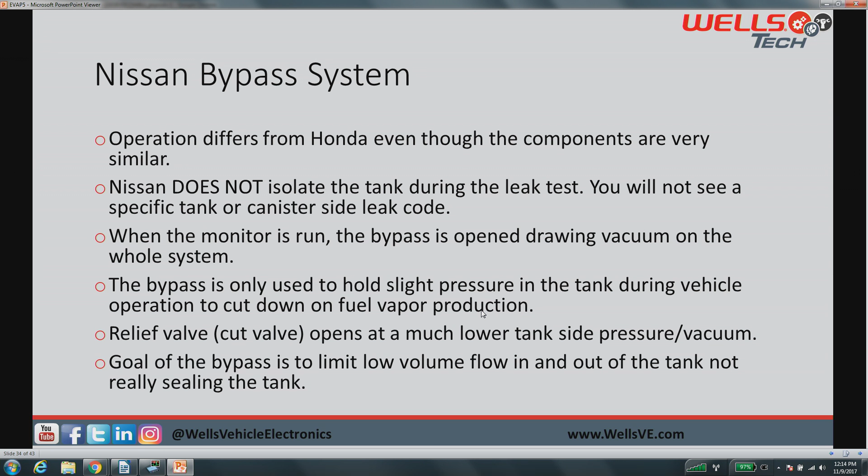The cut valve on this thing, or the bypass valve, or the relief valve, whatever you want to call it, operates at a much lower tank side pressure or vacuum. Their goal isn't to build up 7 inches of water, it is much lower on these systems. Its goal is to limit the amount of flow of vapors, not so much the vapor generation. It's not really sealing the tank, it's just basically limiting the amount of flow that can happen out of the tank during normal vehicle operation. Obviously, during fuel filling, there's going to be a valve that would open to allow that pressure to escape.

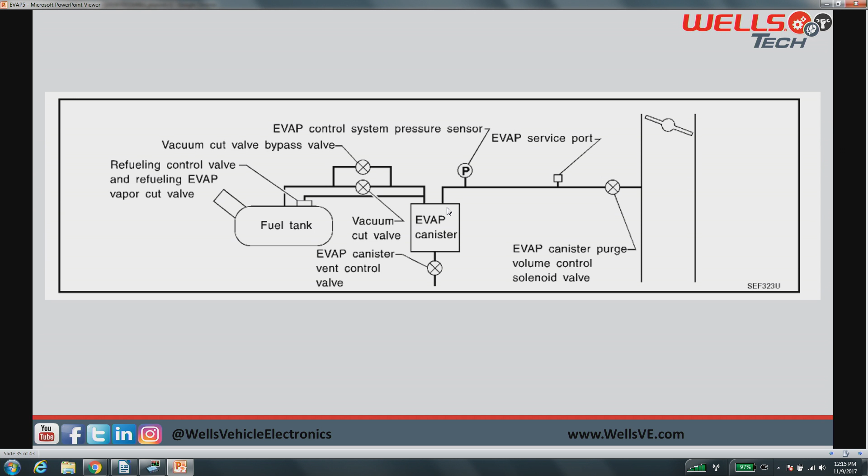In theory, we are not measuring, until one of these valves is opened, the entire system. We are only measuring the canister side of the system. So keep that in mind. Nissan and Infiniti is going to operate the fuel tank pressure sensor different than Honda. The system is similar, the location of the FTP is what changes everything.

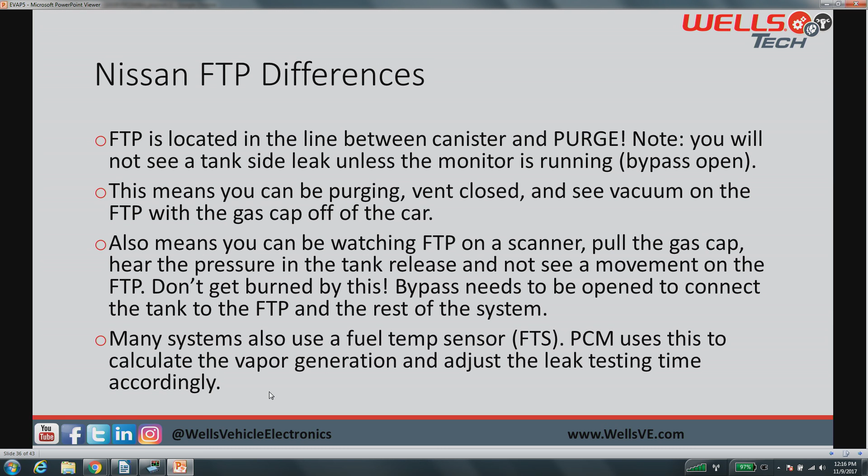All right, this is just calling that out, similar to the Honda, except pretty much the opposite fuel tank pressure sensor readings. Here I'm talking about pulling the gas cap while watching fuel tank pressure, and you could see that you might not get any movement because the bypasses are closed. Also on some Nissan Infinitis, you will see a fuel temp sensor, and that's going to be used to help calculate vapor generation. Hotter fuel is going to generate more vapor, potentially, than colder fuel.

So here's the basic leak test for a Nissan system. The bypass is going to be right here. Similarly, our fuel tank pressure is going to sit somewhere around 3.3 or 4.2, and then we should see that drop as our system is opened.

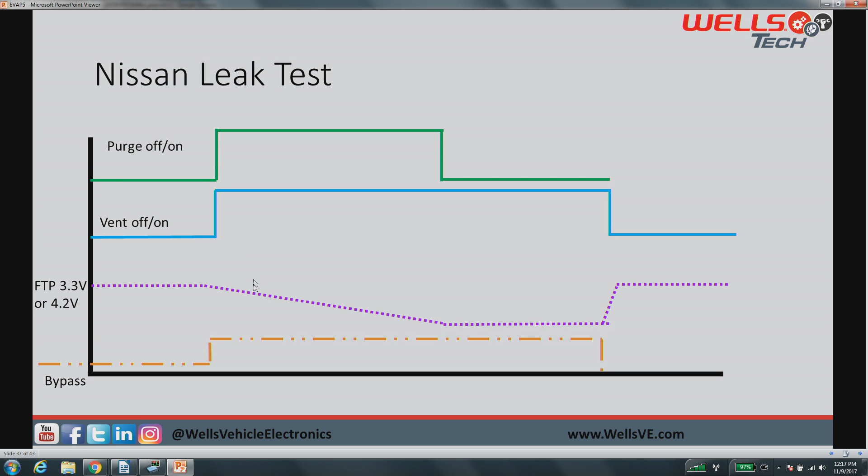Mitsubishi, oh, must have missed the header page. Okay, Mitsubishi is going to use mostly purge seal systems. One major thing is watch out for that vent filter for blockages. These are all the parameters. I just wanted to list them up here so you guys could see what it takes to run the EVAP test. I'm not going to go any further into this, besides I want to call out 3 different things.

One, it's looking at volumetric efficiency of this vehicle before it's going to run the EVAP system. I thought that was interesting, 25 to 80% VE. The other thing is that this will not start the test until at least 16 minutes after driving. I don't know if 15 minutes just wasn't adequate, but 16 minutes is their spec. And then also you do need to be going more than 18.7 miles per hour. I don't know why it couldn't be 18 or 19 or 20 or 15, but 18.7 is their spec.

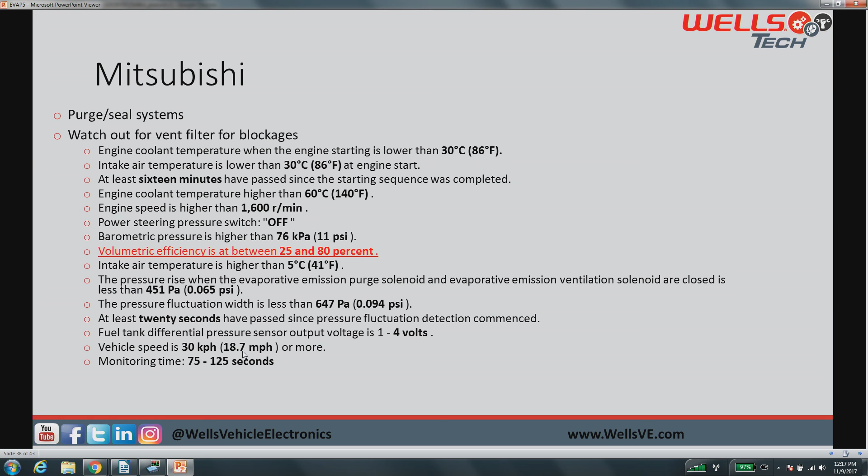You know, these engineers designed these specs for a reason, we got to follow them. Make sure you're going more than 18.7 miles an hour if you want to run the Mitsubishi test.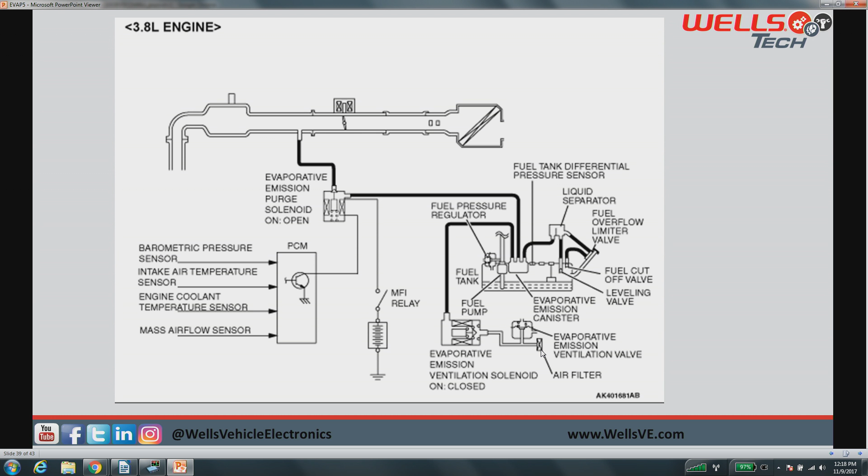Nothing too fancy here, pretty much same old, same old. Right here is our vent solenoid, normally open, closed for testing. And right here is our air filter. So again, if you're testing one of these systems that's building up pressure inside of it when it's not supposed to be, make sure you verify that the EVAP system air filter is operational.

Subaru. I think this might be the last model that I'm going to cover. Subarus, first of all guys, are going to be notorious for a lack of information on the scan tool. I played around with a 2010 Legacy, and I was a little bit surprised at the little bits of information they gave me. I could run a leak test with the scan tool, but that was really about it. I was able to see a fuel tank pressure PID and a vent PID, but that was about it. I didn't have much for control, I didn't have much for testing on the scan tool. So just know that on Subarus, they are going to be notoriously bad for scan tool parameters. I tried multiple tools and was not very lucky with systems on there.

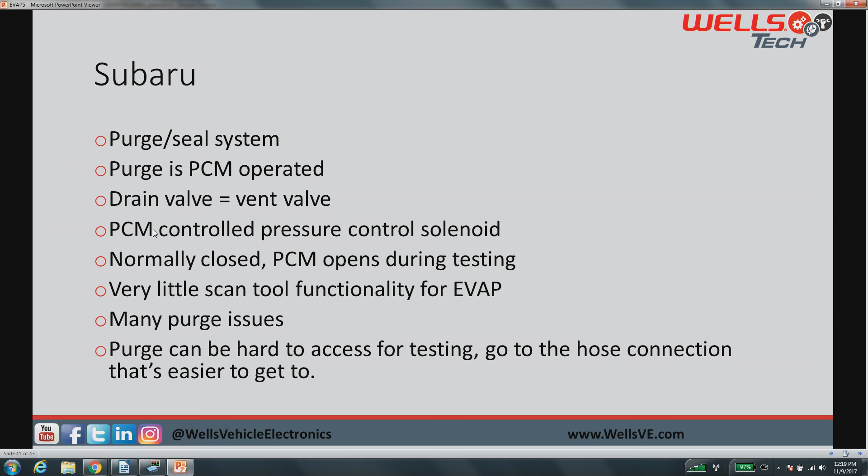Most Subarus will run a purge seal system. The purge, again, is PCM operated. They can call the vent valve or vent solenoid a drain valve, similar to that Nissan that was calling it a drain valve, or somebody else was calling it a drain valve. Same thing here, vent equals drain, same thing. Then we are going to have a PCM controlled pressure control solenoid. This is the same thing as the bypass that's running on Honda and Nissans and some of the other models. It's again going to be PCM controlled. It's going to open and close depending on the situation. Again, this is going to be a normally closed valve that the PCM opens during leak testing.

Subarus have a lot of purge solenoid issues. That purge solenoid can be hard to get to on that boxer motor. So there's usually a steel line coming off of them with a rubber line that then goes to the rear of the vehicle. Sometimes instead of getting to the purge itself, if you're able to activate it with the scan tool, pull the rubber line off the steel line and do your testing there. Whether you're checking to see if the purge is leaking or functional, you can do it there instead of having to get underneath the intake manifold to get to that thing. So just a quick little tip on that.

Here's some parameters for leak testing. I thought it was interesting they were calling out air-fuel ratio with some huge skews in numbers here, 0.76 to 1.25 lambda. 1 would be stoich, 14.7 to 1. So I thought it was interesting how much wiggle room they were giving AFR here, especially because if this thing is setting rich or lean codes, it's not going to run the EVAP test anyway, so I don't understand why they care about this, but they do. Apparently they are watching it before you run the test. This is a precursor for this. Also, we're at 75% here for fuel and 25%, instead of 15 and 85, so keep that in mind.

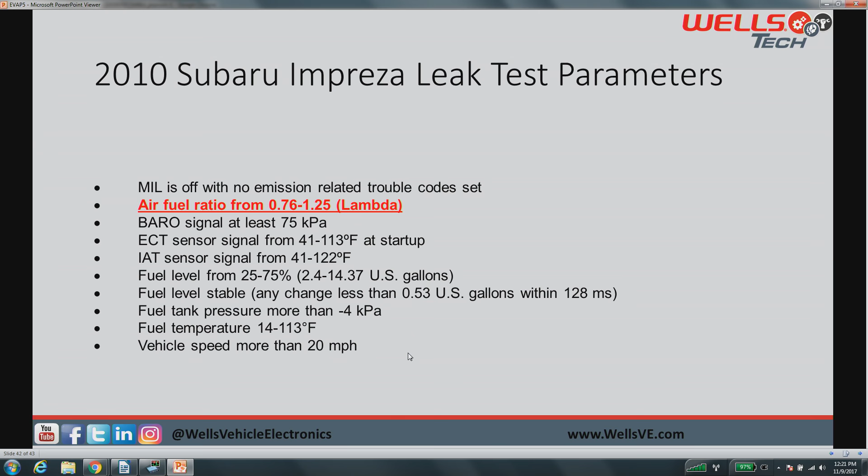All right, okay, guess what guys, that's the end. The end of EVAP, or at least the end of these live EVAP classes. I think I've pretty much covered every single style of system out there for EVAP. I'm sure there's some other one-off systems that I haven't covered with some intricacies that are going to have to be addressed every time you look at them, but the majority of the systems have either been covered in depth, like the Honda or DMTL, or briefed over like the Subaru we just talked about. You guys should have all of the tools at your disposal for tackling most of the EVAP problems that come into your shop.

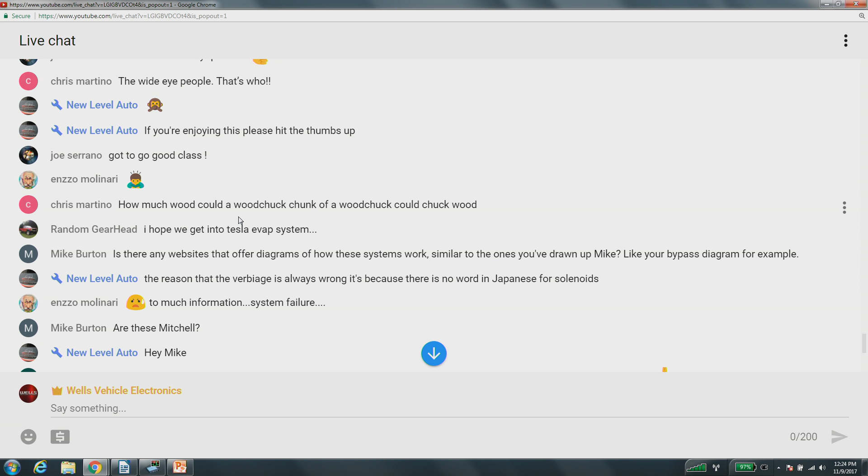I wonder if those batteries have any sort of gassing principles, like a ventilation type system for an EVAP on a Tesla. Is that a sealed system? I know on a lot of other hybrids they just have a fan blowing air in and out for cooling. But if you put a standard 12-volt battery under the seat of an old Buick or something, they always had vent lines on there. I wonder if there's any sort of vent system for the batteries on a Tesla or any other full electric car.

Definitely not my specialty, lacking knowledge on Teslas. I've never worked on one, never even gotten to drive one yet. Maybe someday - I've heard they're fantastic vehicles.

Are there any websites that offer diagrams on how these systems work, similar to the ones you've drawn up? Mike, most of this stuff comes out of the factory service information, whether you're getting it off AllData, Mitchell, Identifix, or right out of the book like that Porsche one you sent me. That's where you'll find most of this stuff. Otherwise, you've got to take what they give you and build it yourself. A lot of the graphs I built are just based on the knowledge we know from the system, what it's doing. We don't always have all the parameters, but we can draw something that makes sense. I've got a whiteboard sitting right next to my desk - when I'm working through a system, that's what I do. I draw it up on the whiteboard and see if it makes sense, see if the test parameters make sense, and look for things that might cause problems during that test. So I don't know if you'll ever find all those diagrams in one place, especially for free, but typically you'll find them in service information.

Autonomous vehicles, Terry, I really want to get into something autonomous. I want to play around with it. I want to get a Tesla in here that's running that autonomous system, whatever they're calling it now. Cadillac's got a new system out. I really want to play with it. I want to figure out how exactly it works and the intricacies of it, because I think it's fascinating. I think it's just really cool stuff. I think the future is going to be very interesting for the automotive world here.

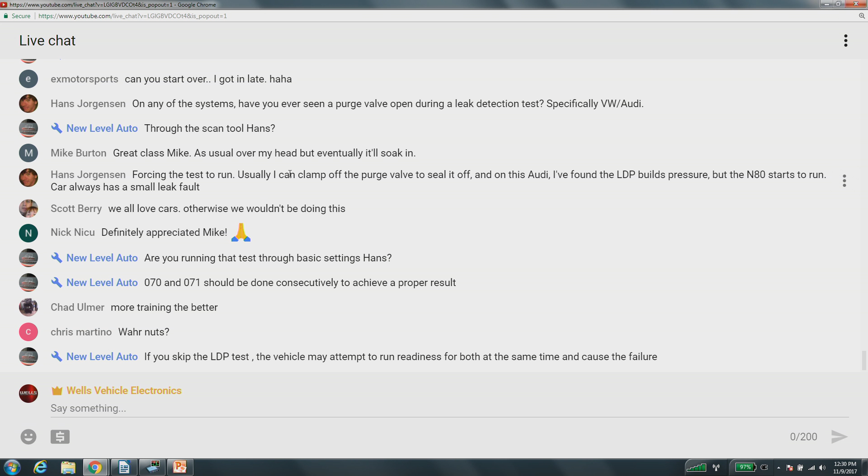On any of these systems, have you ever seen a purge valve open during a leak test? Well, Hans, the purge valve has to be open at the beginning of the test, right? But then it should close. Forcing the test to run, usually I can clamp off the purge valve to seal it off. And on this Audi, I found the LDP builds pressure, but the N80 starts to run. That's interesting. Forcing the test to run, you can clamp off the purge to seal it.

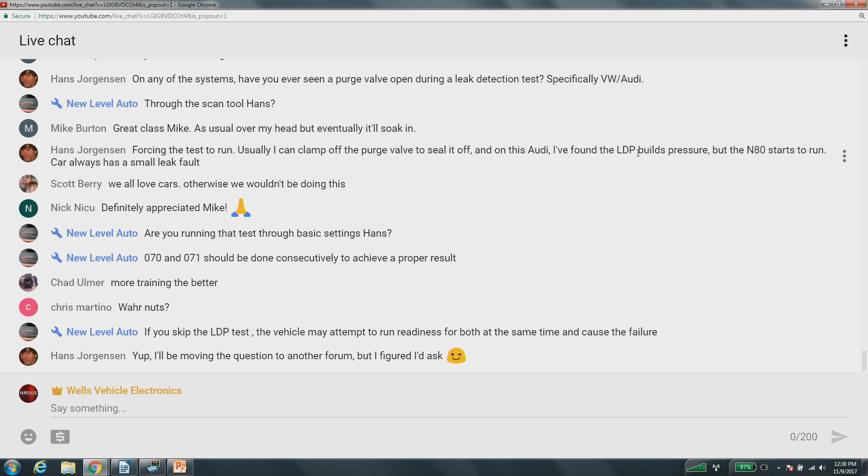Well, it depends, I think, on how the LDP system is getting vacuum. If it's a true LDP like a Chrysler system, it needs vacuum to operate. Is it using the purge line to build vacuum to make the diaphragm inside move up and down? Is it using the purge for that? I don't know off the top of my head if they're running a separate line like Chrysler does that's just full intake vacuum or not. But that's a great question.

Wire nuts, Chris. Wire nuts. More. Is my accent showing? I had a guy the other day leave a comment on a video asking if I was from Minnesota. Definitely not. But I guess people from Wisconsin also have an accent, as well as our eyes are apparently spaced too far apart, according to Keith.

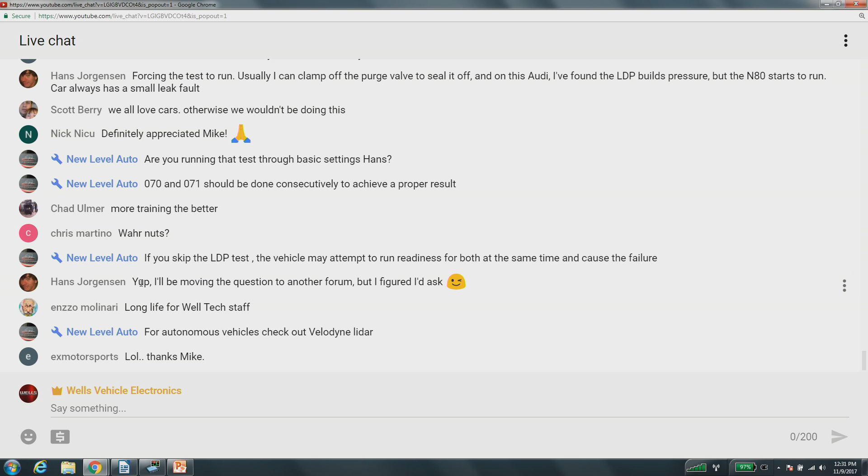Hans, I'm gonna look into this a little bit more for you. It's a really interesting question. I'm not sure on the answer, and I don't want to give out an answer that's wrong. So I'll look into this a little bit more, and if I can find some information for you, I'll be sure to bring it up in the next Tech Connect episode and let you know what that answer might be.